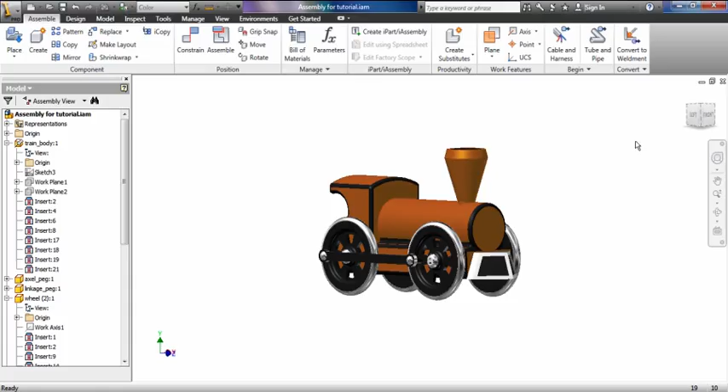The first thing I'm going to do is just rotate my wheel so that the bar is parallel to the ground. And then on the other side of the train, I'm going to make the bar parallel as well, but I'm going to bring it up. So one bar is going to be up, one bar is going to be down.

Now we're going to modify the wheel. To modify the wheel or any other component while you're in an assembly, you just double click the wheel, and you'll notice that the train will turn a translucent or transparent shade because we're now focused on the wheel, and you'll actually see the revolution and extrusions and everything that we created the wheel with. We basically entered the IPT on the fly.

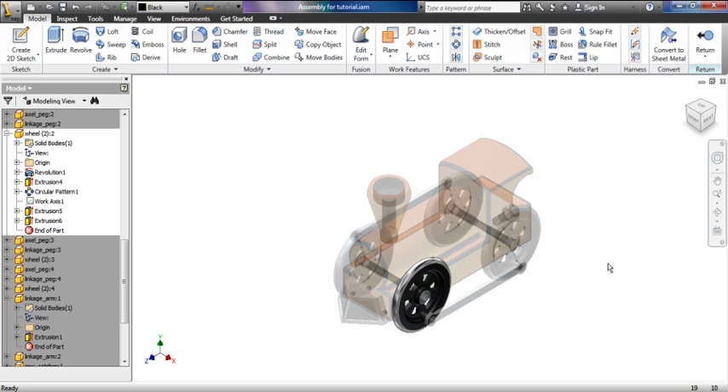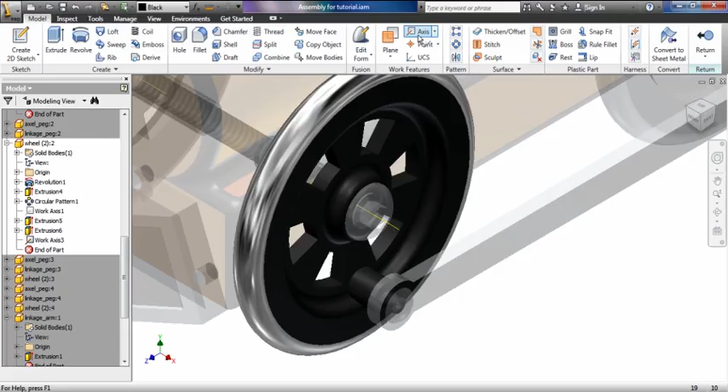So what we're going to do is add a couple of work axes and a plane to our wheel. I'm going to grab my axis, which is right up here, and I'm going to click on the middle cylinder, the hole in the middle of the wheel right here. You'll see that the axis is now shown up right here. Then I'm going to grab my axis again, and I'm going to put an axis on the hitch peg right here as well, right on this cylinder.

So now I've got an axis here, an axis here, and with these two axes we're going to make a plane that intersects both of them. I'm going to go to plane, click the plane button and make a work plane, and click on this axis and this axis.

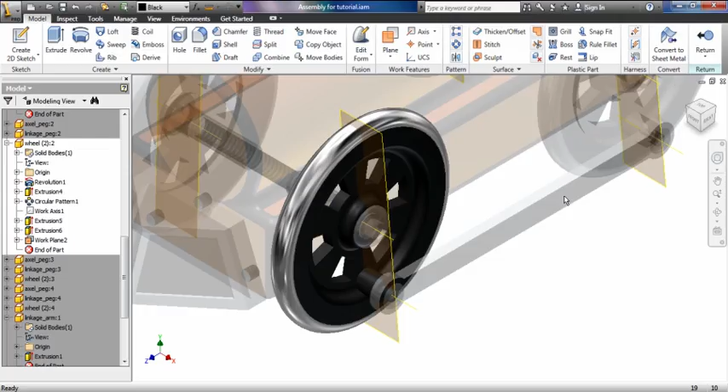Now you'll notice that there are planes on all the wheels, because this wheel is the same all the way around the train. It's the same wheel, I just set it in the assembly 4 times. So now I've got a plane on all the wheels. Now I'm going to hit return. This button is going to bring me back to the assembly. And now we have all of our planes.

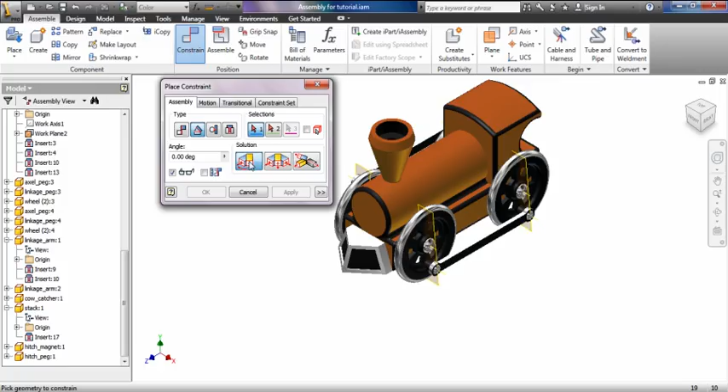So what I want to do is confine, make it so that these two planes are always parallel with one another no matter what. I'm going to go to constrain. Not exactly parallel, but just angle to each other. I'm going to go to angle, and I'm going to do the solution directed angle, which is this one right here. I'm going to click the front plane right here in the front, and this plane as well. 0 degrees, hit apply.

Now what this has ensured is that no matter what, these wheels or these planes are always going to be at the same angle to one another, and so now this thing is never going to be able to go off kilter like it did before.

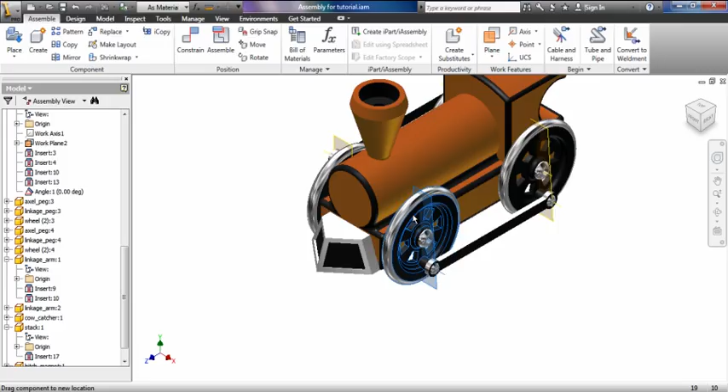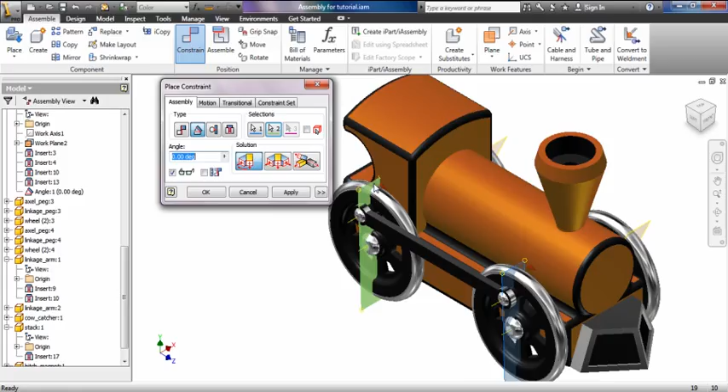So I'm going to put it down, go to the other side, and do the same thing. Constrain, angle, directed, click this front plane right here. Make sure you're hitting the plane, not the wheel. So hit the plane and this plane as well. Hit apply. Now this side's done.

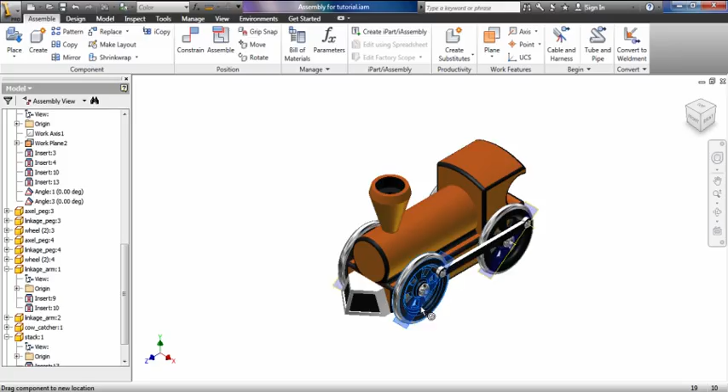I'm also going to do a directed angle to this plane and this other front plane, and that's going to make it so that the wheels spin at the same time. I'm going to click this plane and this plane right here and hit apply, cancel. Now when I go back into my train, grab the wheel, you'll notice that the wheels now move simultaneously. So if I move this side, the other side moves too.

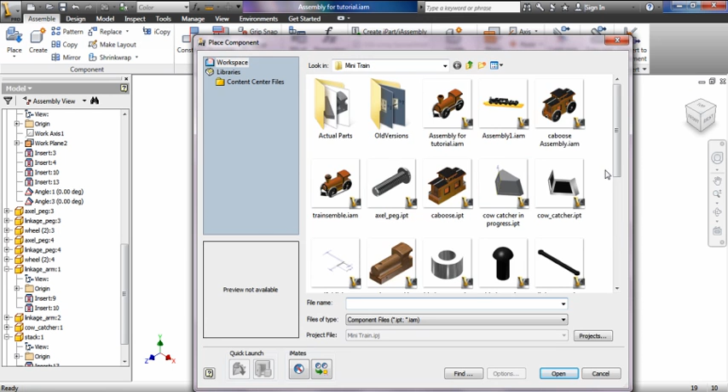Now we're going to put the train on the track. I'm going to go to place, and I'm going to grab my track, place, done.

You can place the track below the train and keep the train grounded, but for this I like to unground the train. The train body is grounded, but when we unground it we want to immediately ground this so that this becomes now our isometric shape. We don't want to unground the train body and rotate it out of kilter or anything.

So I'm going to click on the track, click on the track with the left button of the mouse and then right click it and go to grounded.

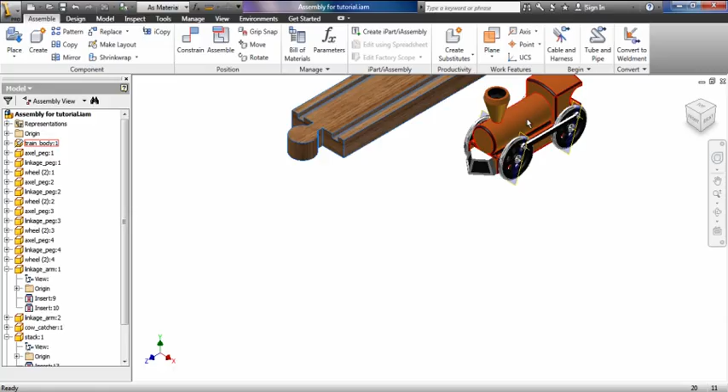So I right clicked and want to ground it so it's checked. Now I'm going to click on my train body, right click it, and go to grounded off, and that way we can put the train on the track.

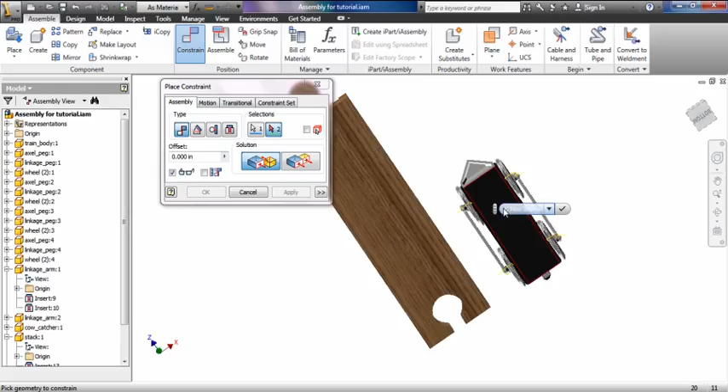So the way we put the train on the track is go to Constrain, and I'm going to choose Mate, and I'm going to mate the top of the train to the bottom, bottom of the train to the top of the track. And right now, the bottom of the train is going to be right up against the top of the track, but I want my wheels to be inside these little grooves.

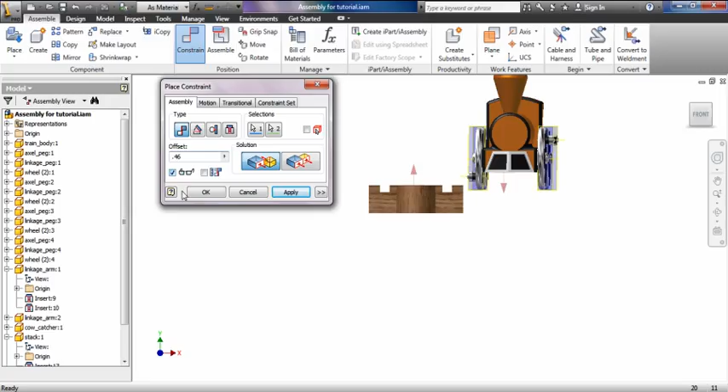So you're going to offset it. 0.45, or 0.46 I mean, 0.45 seems to be a good number to use for the mate.

So the wheels are going to be in the track here. I'm going to hit apply, and then I'm going to go to flush, and I want to flush the side of the train to the side of the track.

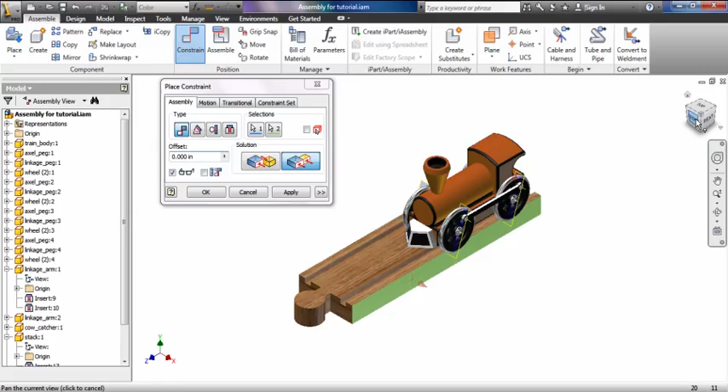And if I look at it from the front, you'll notice that the wheels are off kilter here. So I want to offset this as well. 0.7 is a good number to use. You can see that the wheels are right in the middle of the track here. I'm going to hit apply and cancel.

And I'm going to click the plus sign over here for the train body. And I've got my mate, which is mating the bottom of the train to the top of the track, and my flush, which is pushing the train over to the side. The flush looks great. The mate looks like it's a little high.

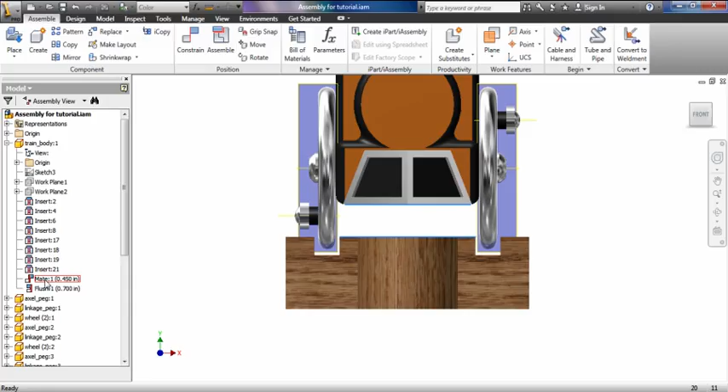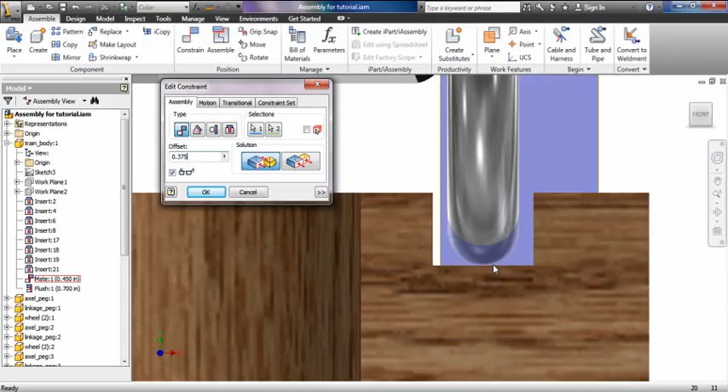So I'm going to right click this mate and go to edit. And it looks like the number is too high, so I'm going to try 0.4. Look at that, we can see that it's already gone down a little bit, but it's not far enough. So I'm going to try 0.375, and that looks like it's working pretty well. The train wheel is right inside the track, 0.375. That number should work for you.

Next thing, I'm going to go to Constrain, and I want the wheel, when I grab the train body and move it, I want the wheels to move along the train. So in order to do that, I'm going to go to Motion, and I'm going to go to Type Rotation Translation, and I'm going to do the distance of 5 inches.

That's the right ratio of how much the wheel is going to move every 5 inches. So I'm going to go to 5. And usually reverse works, so I'm going to do reverse. But if it doesn't, we can go back and edit it later.

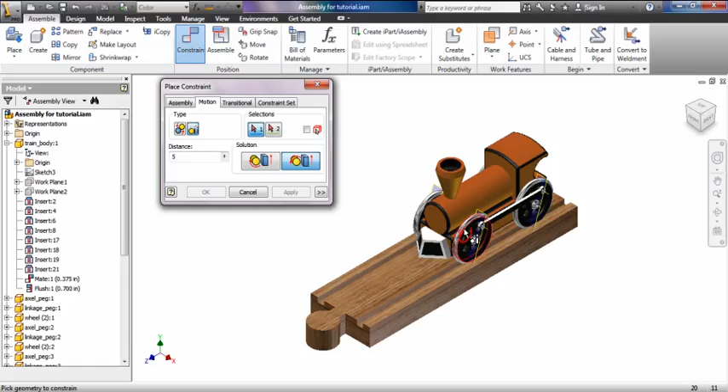And now I'm going to choose the front. Either one of the front wheels is fine. Right on the wheel, I'm just going to click the front of the wheel here. And I'm going to click the front of the track, this face right here, and hit apply, cancel.

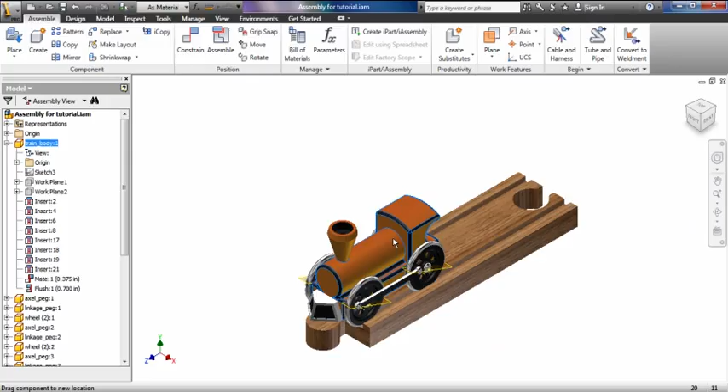And now, if I grab my train and move it, you can see that as I grab the body of the train, the wheels move along with it, which is exactly what we want.

Now, if you happen to, we made the wheels go in reverse, which made it go the correct direction, but if your wheel is going the opposite direction, simply click the wheel that you did it to. You'll see that it highlighted over here.

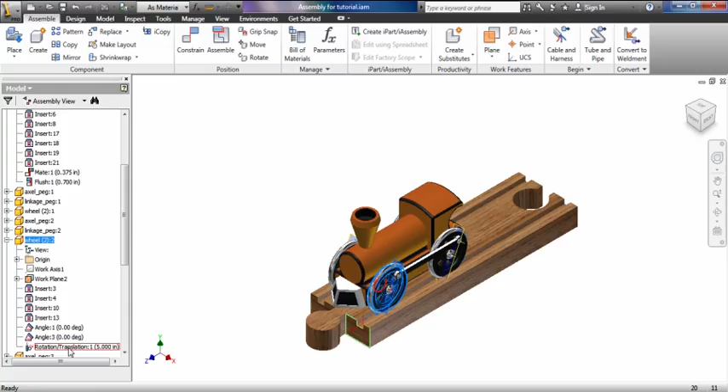I'm going to hit the plus sign and see there's our rotation translation right there. So if I right click this and go to edit, and I go to forward and hit OK, the wheel is going to move the wrong direction now. See, it's going backwards when I move it forwards and forwards when I move it backwards.

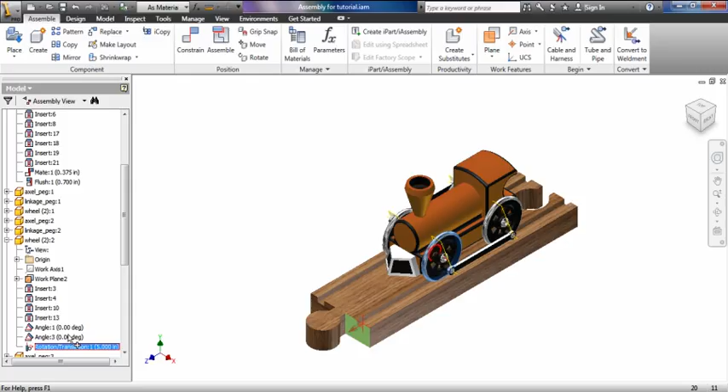So if it did do this, then all you have to do is find the rotation translation, right click it, go to edit, and then reverse the direction. And now it's back to where it used to be, which is the correct place to be.

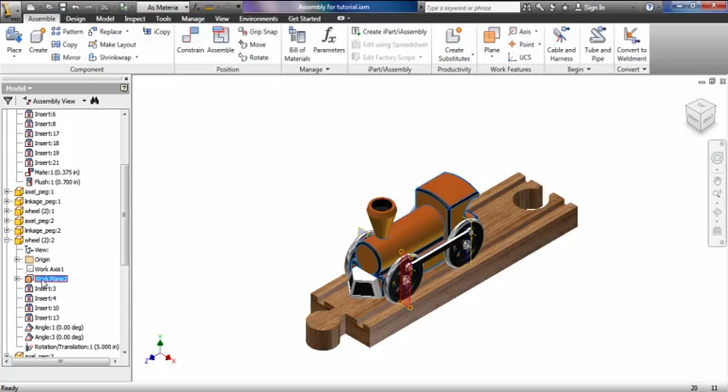Okay, now what we need to do is come into our work plane. So every one of my wheels, it's going to have a work plane and work axes. I want to turn the visibility off of all these, so I'm going to right click it and turn visibility off. Unfortunately, it only does it to the one wheel.

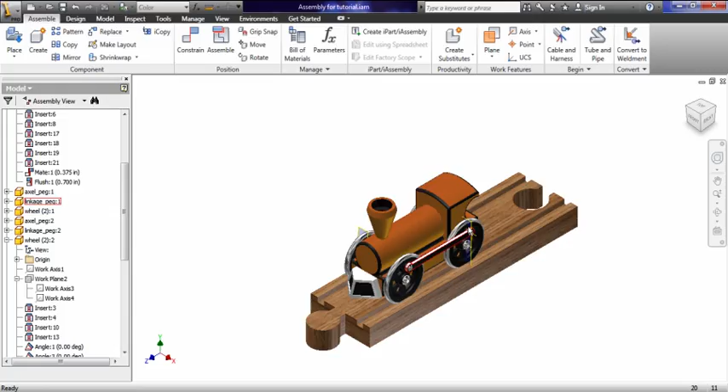I have to go and do it to all the wheels, so I'm going to go into here, turn off the visibility to work axis. So work plane visibility is off. I'm going to hit the plus sign and then turn the work axis visibilities off as well. And I'm going to repeat this step with all the wheels so that all the planes are now invisible.

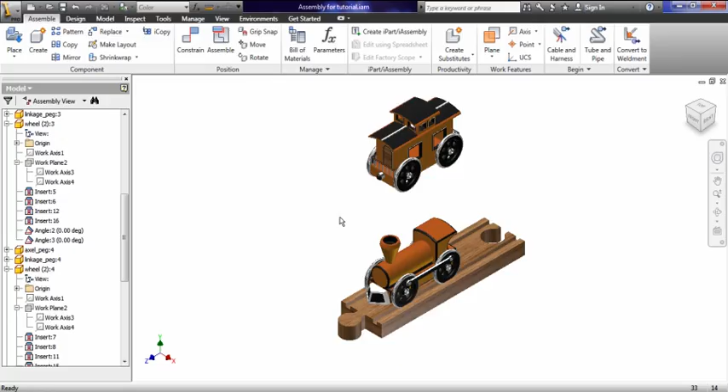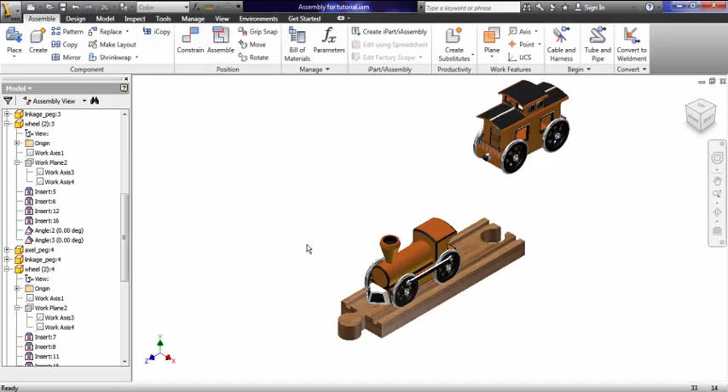Okay, once you've turned all the visibility off of your work planes, what you want to do is assemble your second car inside the same assembly. Do not assemble your car in a separate assembly and then place that assembly inside here, because otherwise the wheels will not turn. You want the wheels to be able to turn. Okay? So make sure that you assemble this inside the same assembly that you've done here.

Alright, this is how you're going to put the next train onto the track. You're going to do it the same exact way you did for the first car. Now on the first car, we have our mate at 0.375 and our flush at 0.7. So we're going to do the same thing for the second car.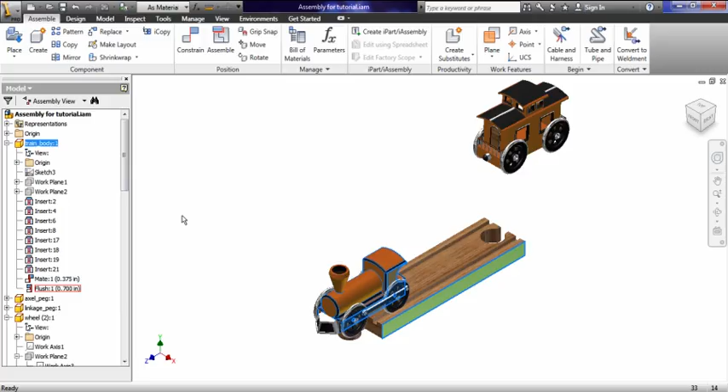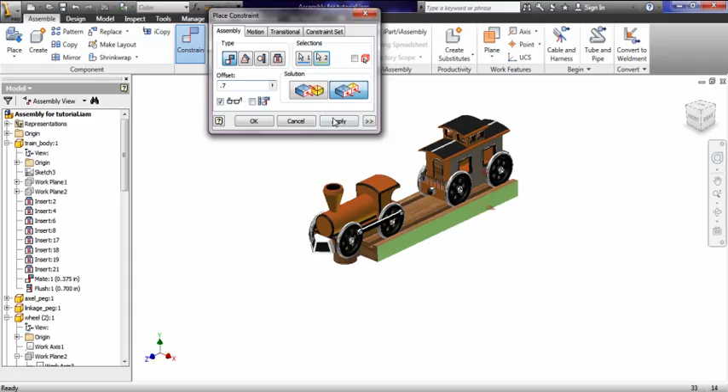I'm going to constrain mate, and I'm going to mate the bottom of this car to the top of the track, and I'm going to do a 0.375 offset, hit apply, and then I'm going to flush the side of the car to the side of the track, and I'm going to do an offset of 0.7. Hit apply, and I'm going to look at it from the back just to make sure that it worked, and it looks like it did, so that's good.

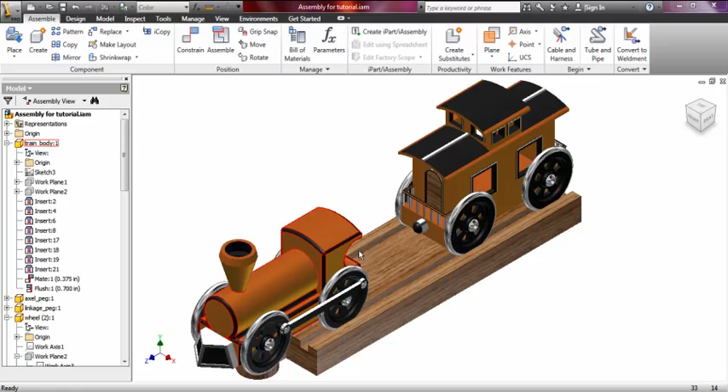In order for the train car here to be touching this train car at all times, what we want to do is mate this car to this car, the front of this car to the back of this car. But when we mate those two together, it's going to make these two hitch magnets basically enter the other car. So what we need to take into consideration is the size of this hitch magnet and the hitch peg.

Now the hitch magnet is 0.25, and the hitch peg head, which is the size we want, because if we look at it from the side, we want to consider the height of the hitch magnet and the height of the hitch peg. And the head of the hitch peg is 0.15, and the height of the hitch magnet is 0.25, so that would equal 0.4. So 0.25 plus 0.15 would be 0.4.

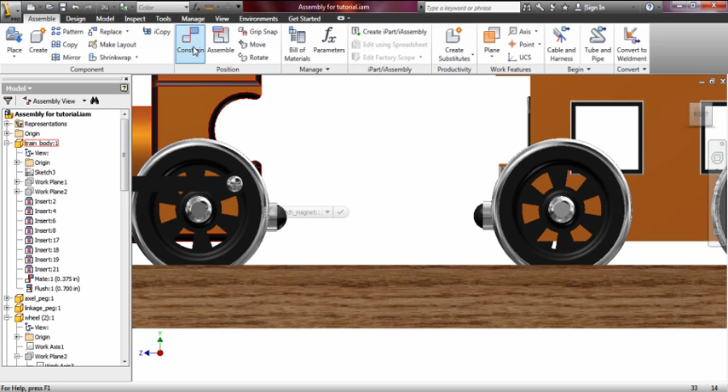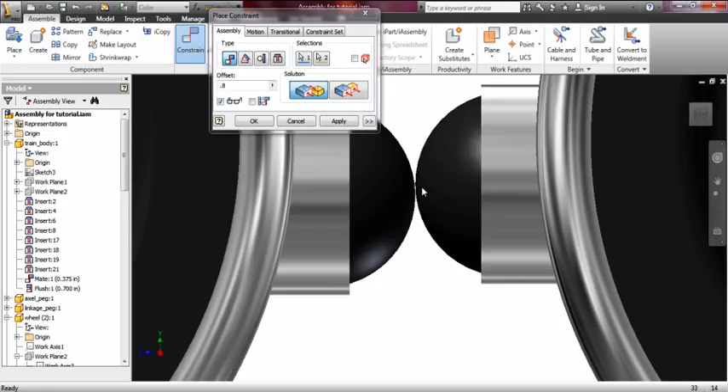So I'm going to go to constrain, and I'm going to mate the front of this car to the back of this car, and we want to do 0.4, but that's only going to get us halfway. We actually want to do 0.8, so I'm going to do 0.8, and you can see that these are just barely touching each other, or not quite, but very, very close, which is fine, and that's what we want. So I'm going to hit apply, cancel. So now the car has been placed, and now I can move the car back and forth.

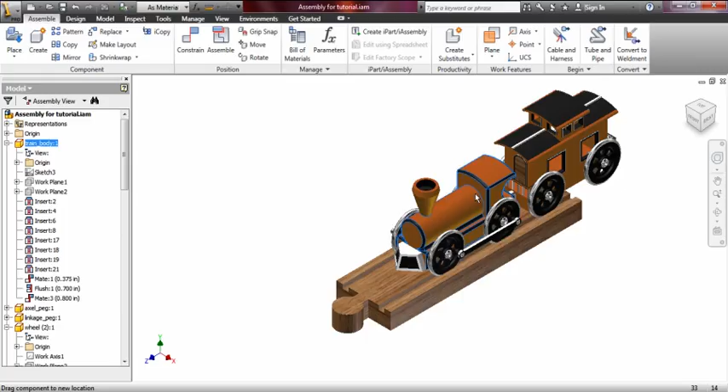Okay? Now you'll notice that the wheels are moving on the front car but not the back, and that's because we've only put the rotation translation on this wheel. We haven't done it on any of these wheels, and so we need to go in and put a rotation translation on each of these wheels. So I'm going to go to constrain and go to motion, rotation translation, distance of 5, and we're going to try forward this time.

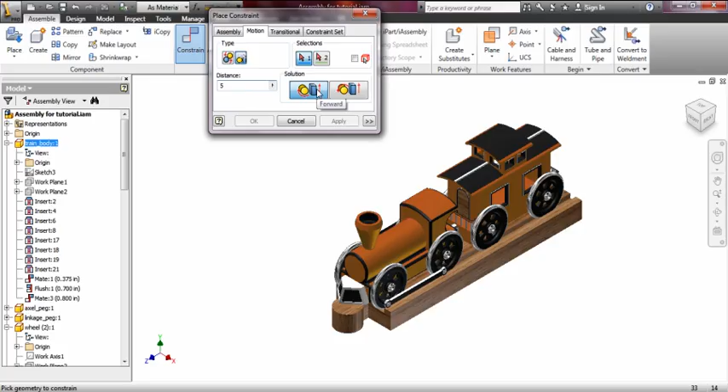I'm going to click on this wheel right here and the front of the track, hit apply, cancel, and look at that, not going in the right direction. So forward did not work. We're going to have to use reverse. Now these ones may require reverse and the other side may require forward. We'll just cross that bridge when we get to it, but you do want the wheels rolling in the right direction.

So I'm going to click on this wheel, find that constraint. It looks like it's highlighted right here. Wheel for the second car. Right click rotation translation and edit it. And I'm going to go to reverse, hit OK, and now the wheel is moving in the right direction. None of the other ones are, but this one is.

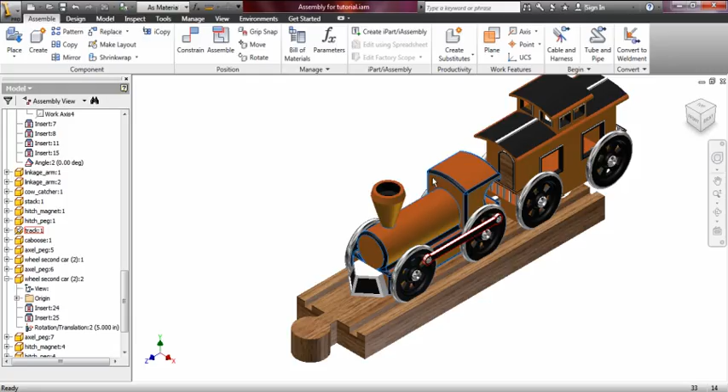Now the reason that we only did it with this one wheel and it did it for all of them is because these wheels are connected with a linkage bar, and this wheel and this wheel have had a constraint done to the plane so that they move sequentially and simultaneously to each other, and so that's why only one wheel needs to be done here. But for this second car, you need to constrain all 4 of the wheels.

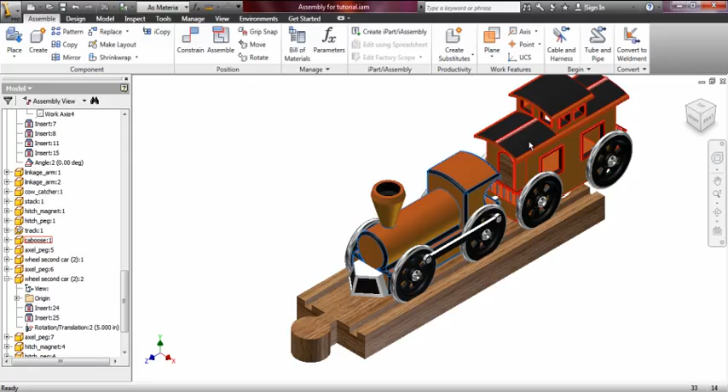Once you've done this, then your train is all set to go. You want to string at least 3 tracks together, and when you complete this, you should have 3 tracks in a row and have the train run on it with all the wheels running.